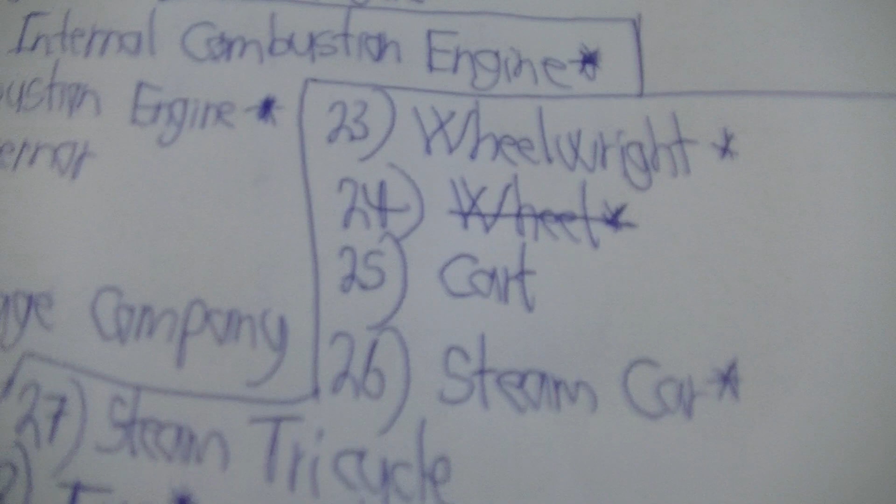I'm making some video in my language, Danish, about the history of the cars. So I was reading about the wheel, the invention of the wheel. That's very important in the history of the car because we need some wheels on a car. These spokes, they are very important too because a wheel only with solid wood, that's not so good.

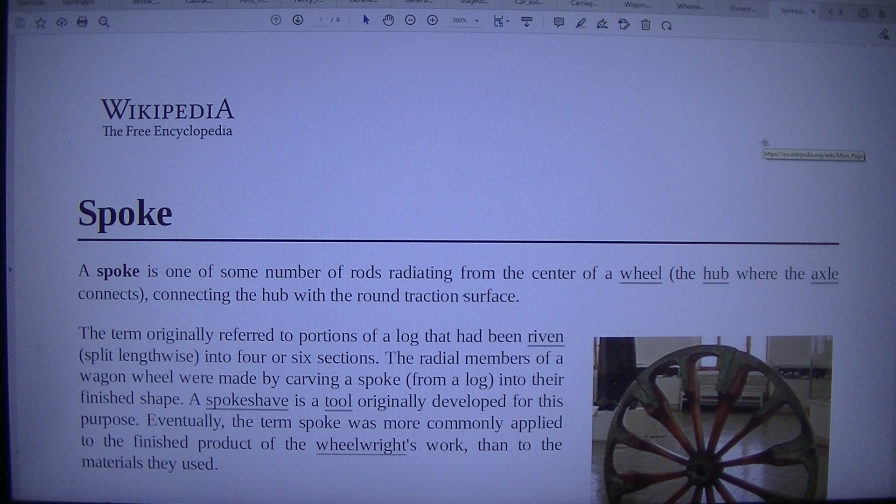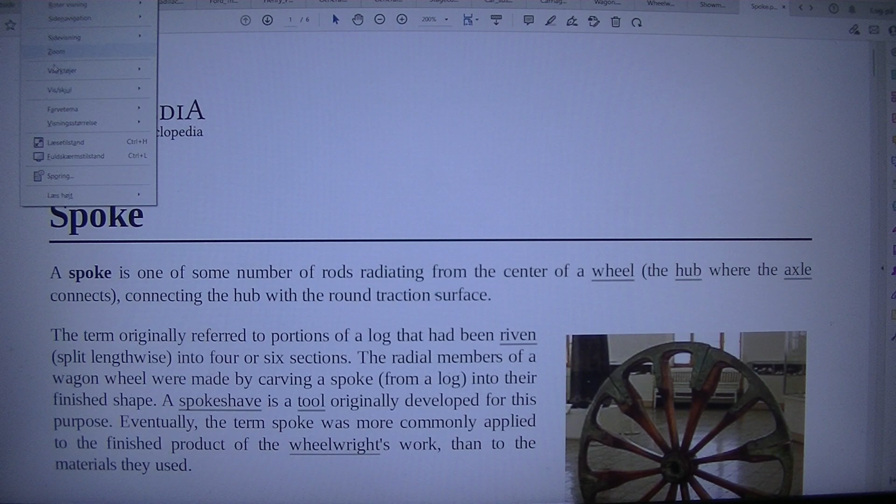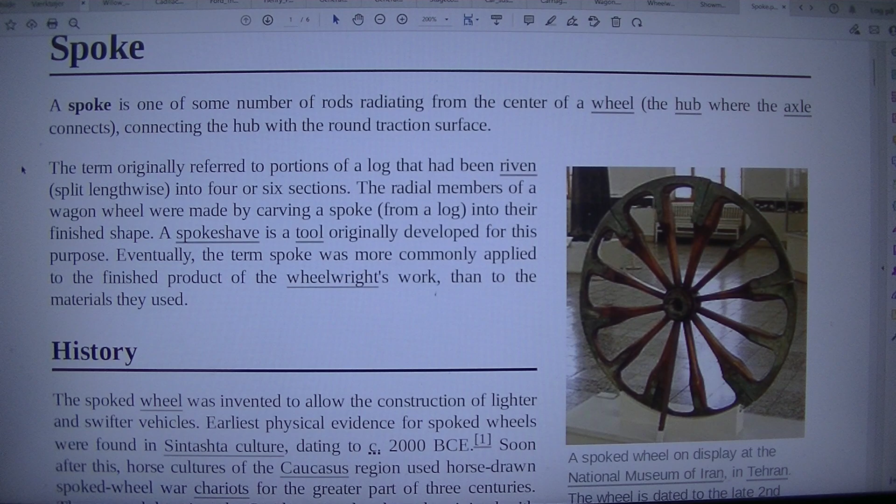Spoke. A spoke is one of some number of rods radiating from the center of a wheel, the hub where the axle connects, connecting the hub with the round traction surface. A spoked wheel on display at the National Museum of Iran, in Tehran. The wheel is dated to the late 2nd millennium BCE and was excavated at Choqa Zanbil. The remains of a pair of cart wheels with metal axle assembly.

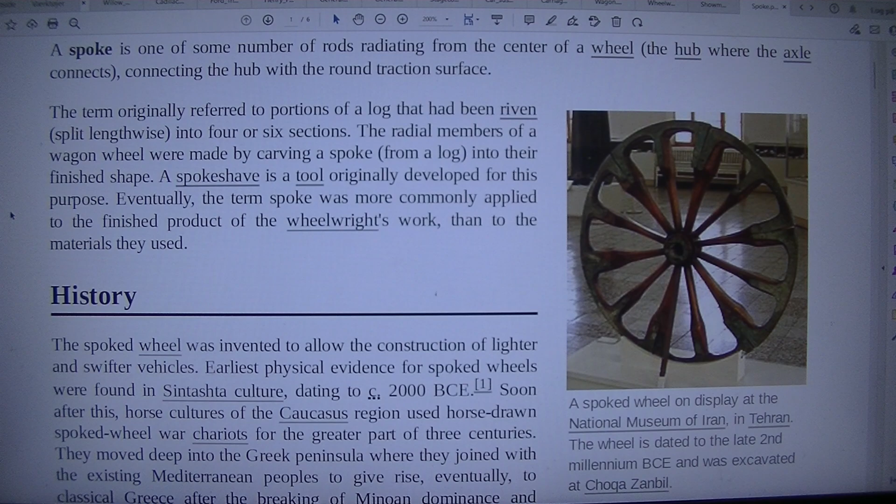The term originally referred to portions of a log that had been riven, split lengthwise, into 4 or 6 sections. The radial members of a wagon wheel were made by carving a spoke, from a log, into their finished shape. A spokeshave is a tool originally developed for this purpose. Eventually, the term spoke was more commonly applied to the finished product of the wheelwright's work, than to the materials they used. History. The spoked wheel was invented to allow the construction of lighter and swifter vehicles.

Earliest physical evidence for spoked wheels were found in Sintashta culture, dating to c. 2000 BCE. Soon after this, horse cultures of the Caucasus region used horse-drawn spoked wheel war chariots for the greater part of 3 centuries. They moved deep into the Greek peninsula where they joined with existing Mediterranean peoples to give rise, eventually, to classical Greece after the breaking of Minoan dominance and consolidations led by pre-classical Sparta and Athens.

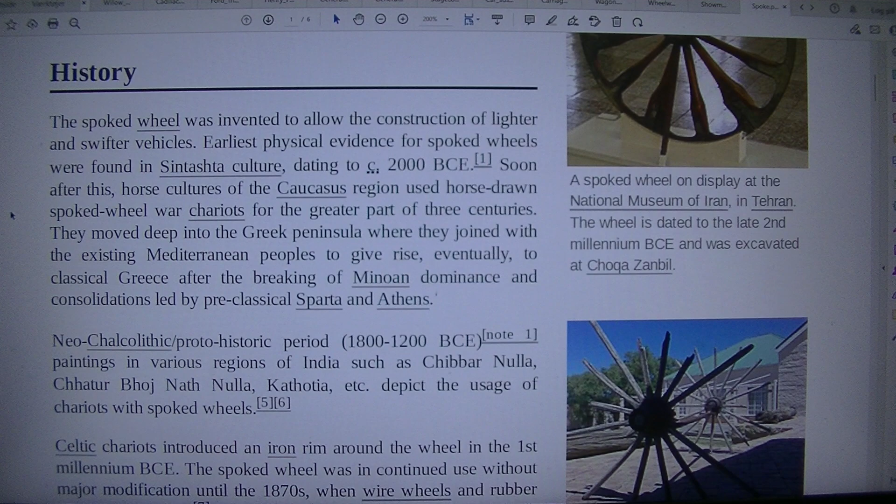Neo-Chalcolithic / Protohistoric period, 1800 to 1200 BCE. Paintings in various regions of India such as Chibbar Nulla, Chhatur Bhoj Nath Nulla, Kathotia, etc. depict the usage of chariots with spoked wheels. Celtic chariots introduced an iron rim around the wheel in the 1st millennium BCE. The spoked wheel was in continued use without major modification until the 1870s, when wire wheels and rubber tires were invented.

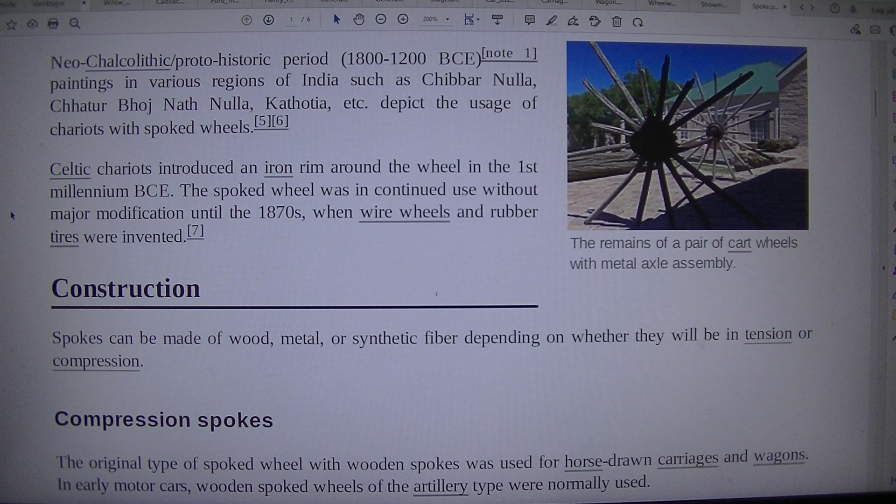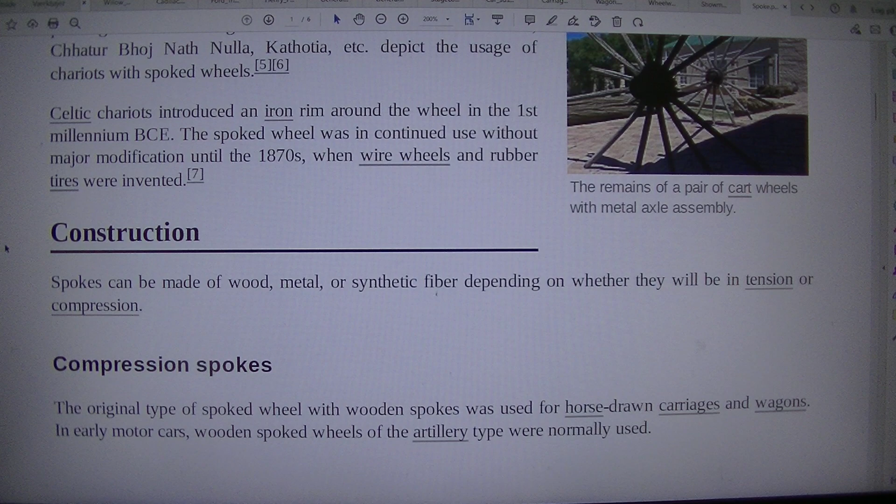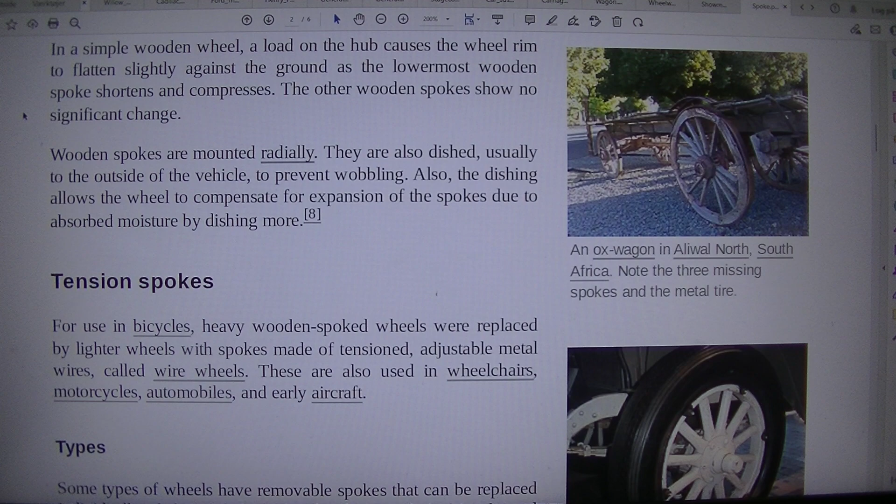In a simple wooden wheel, a load on the hub causes the wheel rim to flatten slightly against the ground as the lowermost wooden spoke shortens and compresses. The other wooden spokes show no significant change. Wooden spokes are mounted radially. They are also dished, usually to the outside of the vehicle, to prevent wobbling. Also, the dishing allows the wheel to compensate for expansion of the spokes due to absorbed moisture by dishing more. Tension spokes. For use in bicycles.

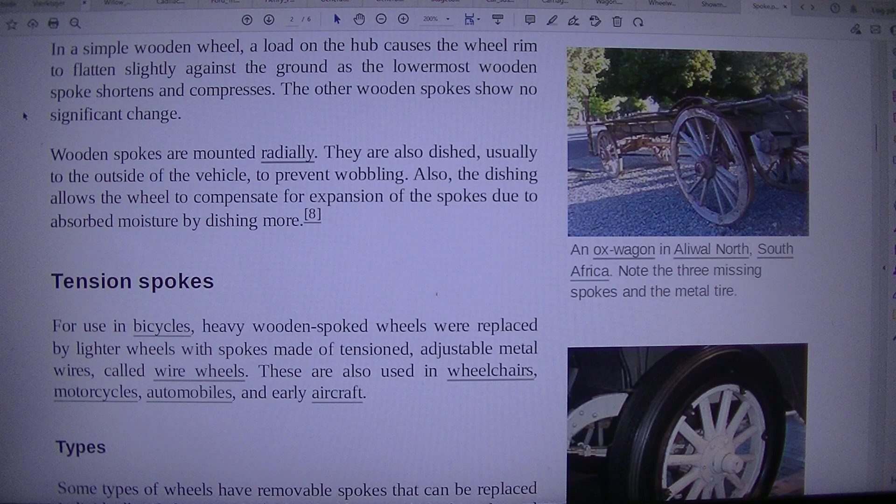Heavy wooden spoked wheels were replaced by lighter wheels with spokes made of tensioned, adjustable metal wires, called wire wheels. These are also used in wheelchairs, motorcycles, automobiles, and early aircraft types. Some types of wheels have removable spokes that can be replaced individually if they break or bend. These include bicycle and wheelchair wheels. High-quality bicycles with conventional wheels use spokes of stainless steel, while cheaper bicycles may use galvanized, also called rustless,

or chrome-plated spokes. While a good quality spoke is capable of supporting about 225 kgf, c. 500 pounds force or 2,200 newtons, of tension, they are used at a fraction of this load to avoid suffering fatigue failures. Since bicycle and wheelchair wheel spokes are only in tension, flexible and strong materials such as synthetic fibers are also occasionally used. Metal spokes can also be ovalized or bladed to reduce aerodynamic drag, and butted, double or even triple, to reduce weight while maintaining strength.

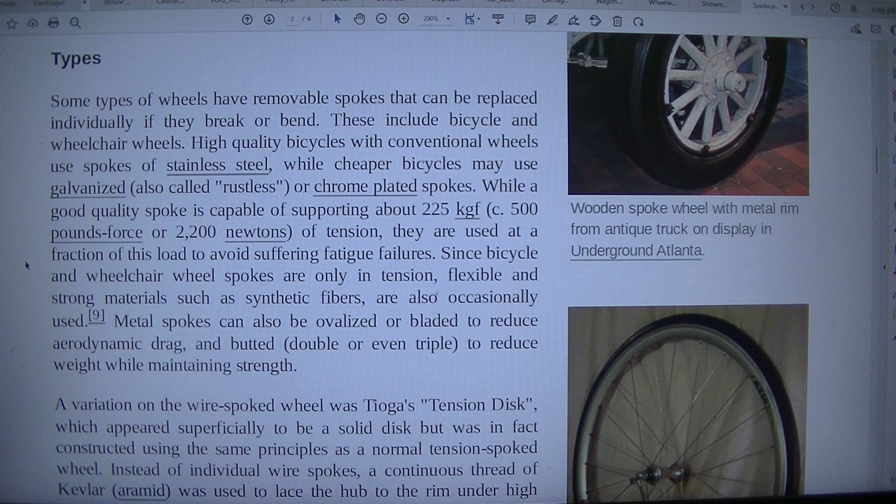A variation on the wire-spoked wheel was Tioga's tension disc, which appeared superficially to be a solid disc but was in fact constructed using the same principles as a normal tension-spoked wheel. Instead of individual wire spokes, a continuous thread of Kevlar, aramid, was used to lace the hub to the rim under high tension. The threads were encased in a translucent disc for protection and some aerodynamic benefit, but this was not a structural component.

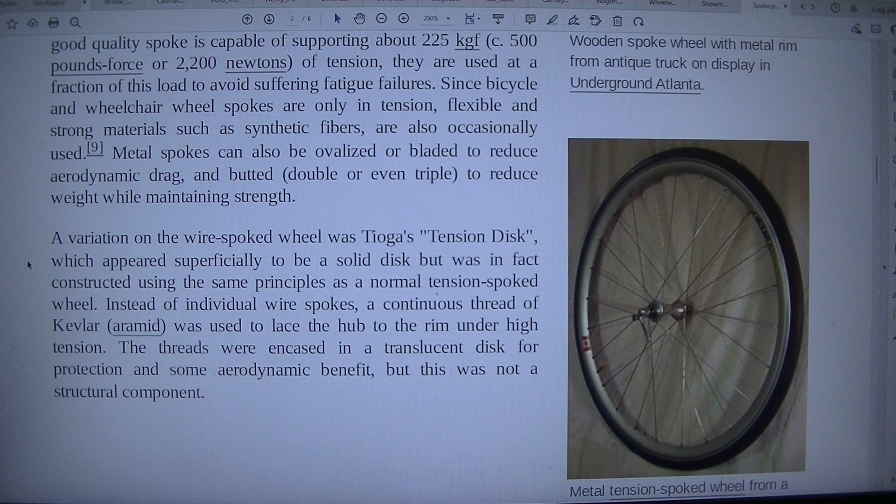Usual spoke diameters: wire gauge, diameter, section area. 15 G, 1.8 mm, 3.24 mm². 14 G, 2.0 mm, 4 mm². 13 G, 2.3 mm, 5.29 mm². 12 G, 2.6 mm, 6.76 mm². 11 G, 2.9 mm, 8.41 mm². 10 G, 3.2 mm, 10.24 mm².

Tangential lacing. Wire spokes can be radial to the hub but are more often mounted tangentially to the hub. Tangential spoking allows for the transfer of torque between the rim and the hub. Tangential spokes are thus necessary for the drive wheel, which has torque at the hub from pedaling, and any wheels using hub-mounted brakes such as disc or band brakes, which transfer torque from the rim to the brake in the opposite direction, via the hub, when braking.

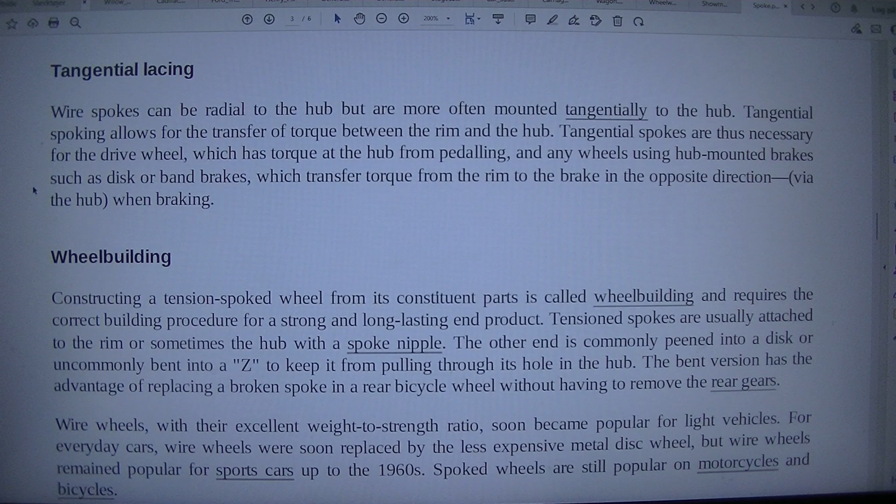Wheel building. Constructing a tension-spoked wheel from its constituent parts is called wheel building and requires the correct building procedure for a strong and long-lasting end product. Tension spokes are usually attached to the rim or sometimes the hub with a spoke nipple. The other end is commonly peened into a disc or uncommonly bent into a Z to keep it from pulling through its hole in the hub. The bent version has the advantage of replacing a broken spoke in a rear bicycle wheel without having to remove the rear gears.

Wire wheels, with their excellent weight-to-strength ratio, soon became popular for light vehicles. For everyday cars, wire wheels were soon replaced by the less expensive metal disc wheel, but wire wheels remained popular for sports cars up to the 1960s. Spoked wheels are still popular on motorcycles and bicycles.

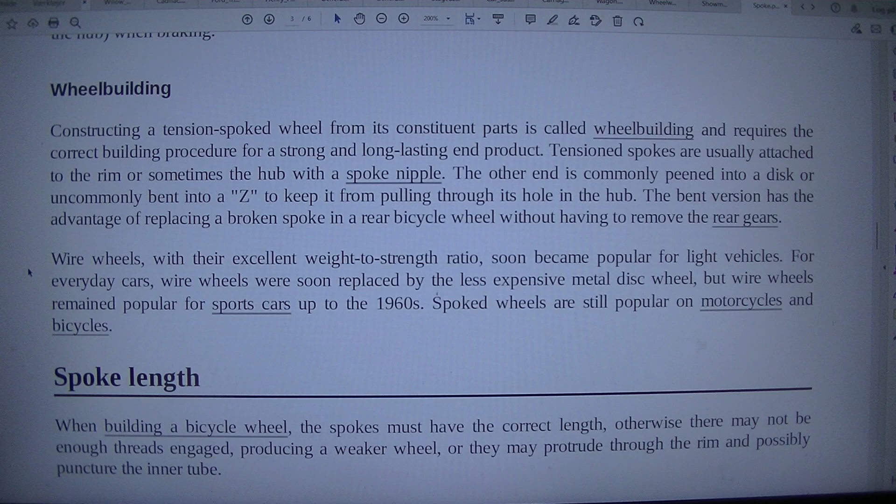Spoke length. When building a bicycle wheel, the spokes must have the correct length, otherwise there may not be enough threads engaged, producing a weaker wheel, or they may protrude through the rim and possibly puncture the inner tube. Calculation. For bicycle spokes, the spoke length is defined from the flange seat to the thread tip. For spokes with bent ends, the nominal spoke length does not include the width of the spoke at the bent end. For wheels with crossed spokes, which are the norm, the desired spoke length is

where d equals distance from the center of hub, along the axis, to flange, for example 30 millimeters. R1 equals spoke hole circle radius of the hub, for example 19.5 millimeters. R2 equals half of effective rim diameter, ERD, or the diameter the ends of the spokes make in a built wheel; see discussion attached to this article for explanation of the rim, for example 301 mm. R3 equals radius of spoke holes in the flange, for example 1.1 mm.

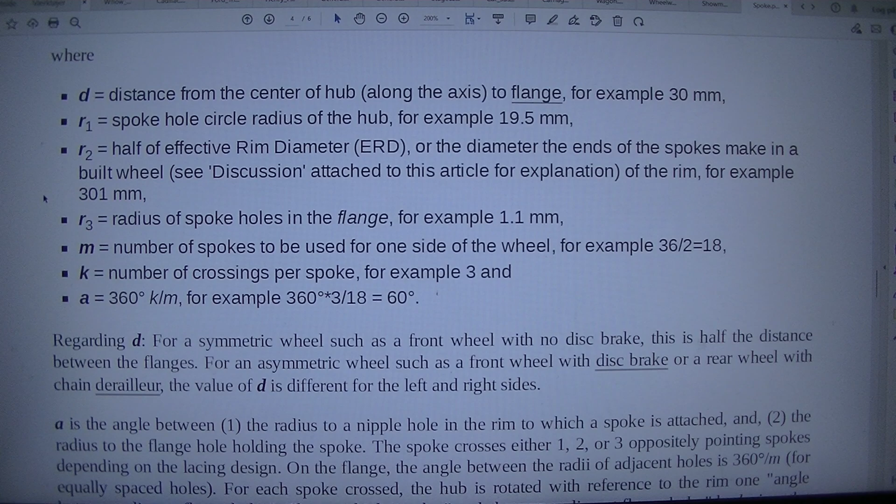M equals number of spokes to be used for one side of the wheel, for example 36/2 equals 18. K equals number of crossings per spoke, for example 3, and A equals 360 degrees K/M, for example 360 degrees * 3/18 equals 60 degrees. Regarding D, for a symmetric wheel such as a front wheel with no disc brake, this is half the distance between the flanges. For an asymmetric wheel such as a front wheel with disc brake or a rear wheel with derailleur, the value of D is different for the left and right sides.

A is the angle between 1. the radius to a nipple hole in the rim to which a spoke is attached, and 2. the radius to the flange hole holding the spoke. The spoke crosses either 1, 2, or 3 oppositely pointing spokes depending on the lacing design. On the flange, the angle between the radii of adjacent holes is 360 degrees/M, for equally spaced holes. For each spoke crossed, the hub is rotated with reference to the rim one angle between adjacent flange holes. Thus, multiplying the angle between adjacent flange holes by K gives the angle A.

For example, a 32-spoke wheel has 16 spokes per side. 360 degrees divided by 16 equals 22.5 degrees. Multiply 22.5 degrees, the angle between adjacent flange holes, by the number of crossings to get the angle. If 3 crosses, the 32-spoke wheel has an angle of 67.5 degrees. Regarding R3, the size of the spoke holes in the flange does not matter for the needed spoke length. This term removes the effect of the hole size. Since the holes are usually small, just over 2 mm in diameter, the effect is small and in practice matters little.

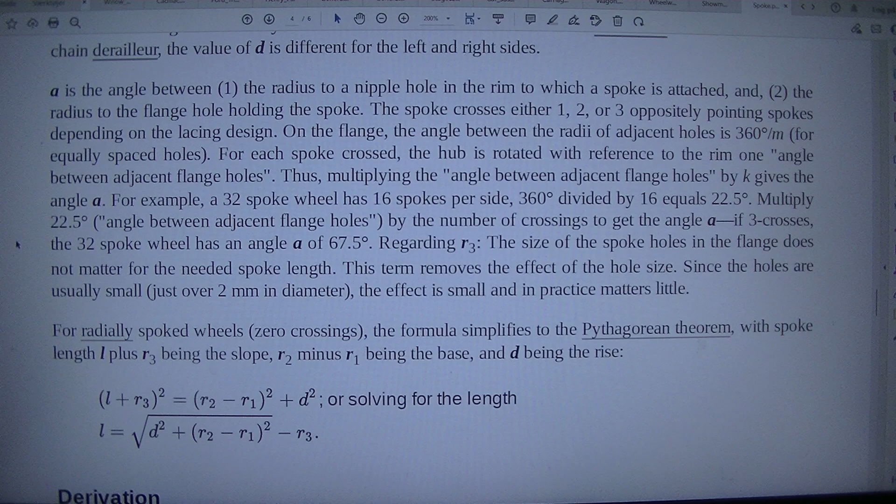For radially spoked wheels, 0 crossings, the formula simplifies to the Pythagorean theorem, with spoke length L plus R3 being the slope, R2 minus R1 being the base, and D being the rise. The spoke length formula computes the length of the space diagonal of an imaginary rectangular box. Imagine holding a wheel in front of you such that a nipple is at the top. Look at the wheel from a long distance. The spoke through the top hole is now a diagonal of the imaginary box.

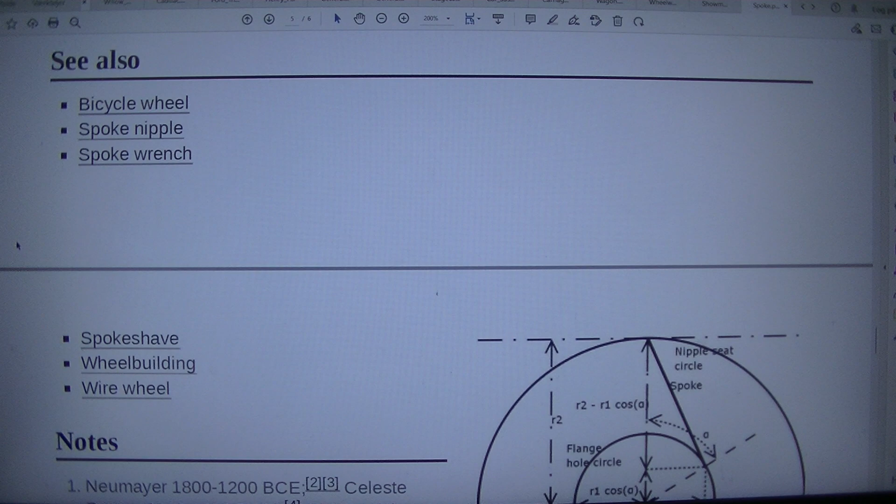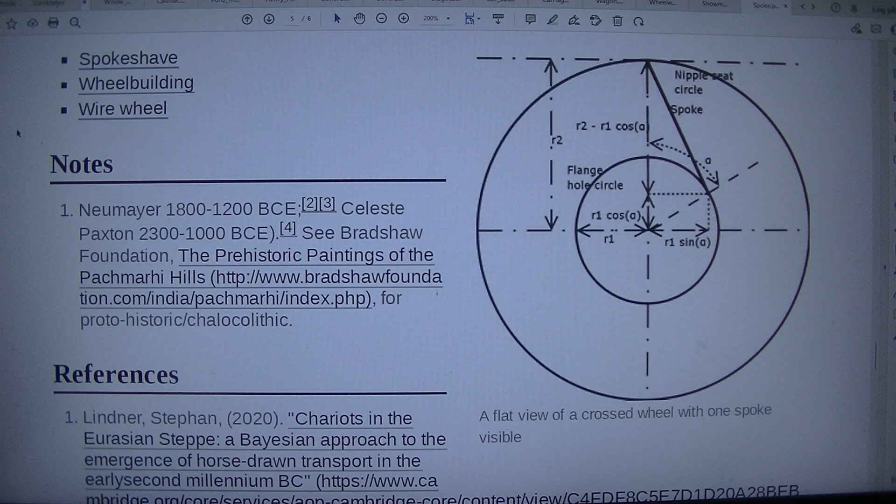The box has a depth of D, a height of R2 minus R1 cos alpha, and a width of R1 sin alpha. Equivalently, the law of cosines may be used to first compute the length of the spoke as projected on the wheel's plane, as illustrated in the diagram, followed by an application of the Pythagorean theorem. See also bicycle wheel, spoke nipple, spoke wrench. A flat view of a crossed wheel with one spoke visible. Spokeshave. Wheel building. Wire wheel. Notes. 1800 to 1200 BC.

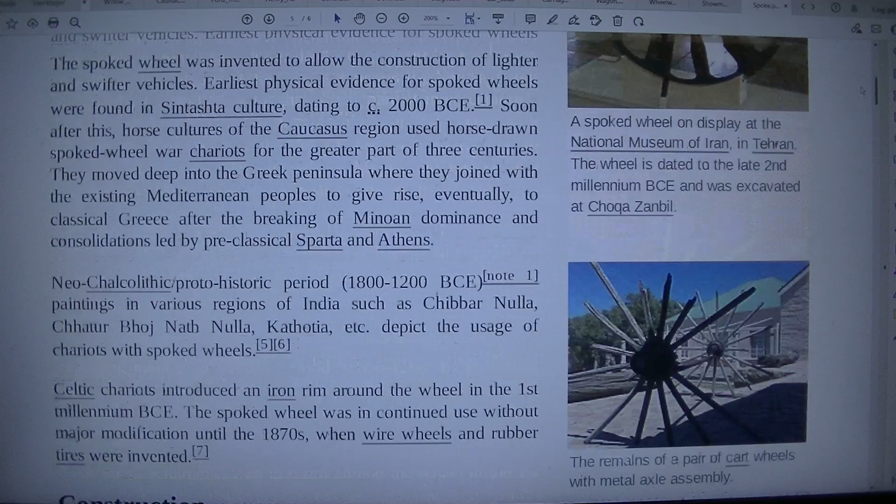Good. Let's stop the video. I will read another one.